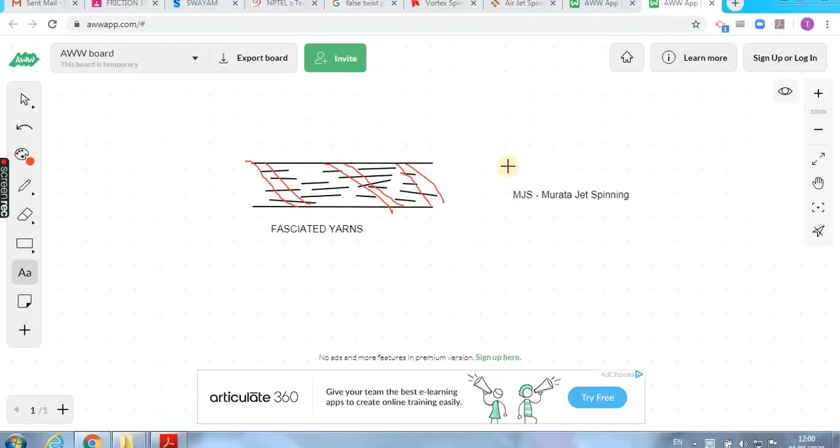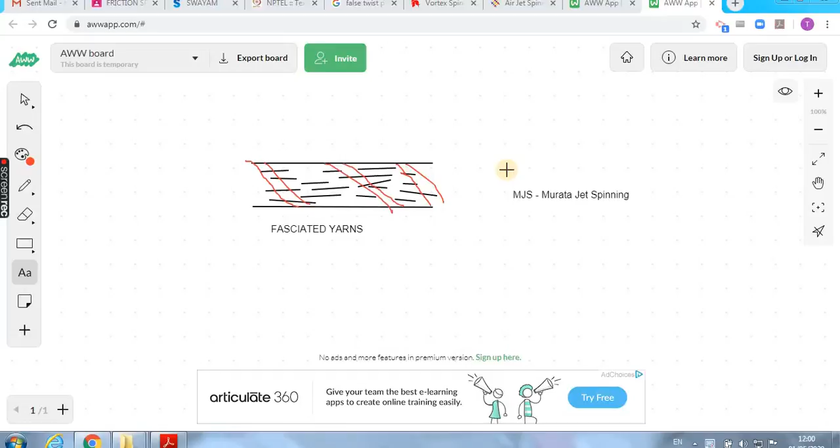So in this video we are going to see the working principle of Murata air jet spinning, or Murata jet spinning, called MJS. We have already seen DuPont. He developed the first machine based upon the false twist principle, but the basic limitation in the DuPont machine is that the proportion of edge fibers is very low, only 2 to 3%, which is insufficient to cover the remaining 95-96% of core fibers.

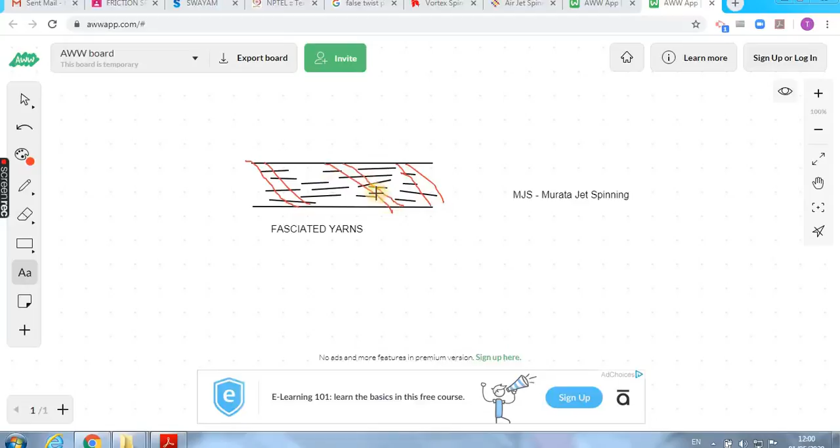So the yarns spun from air jet spinning or the false twist principle are called fasciated yarns. Fasciated yarns are bipartite. They have core parallel fibers over which the edge fibers are wrapped. So these are called fasciated. The main limitation in DuPont is that only 2 to 3% are edge fibers, which are not sufficient to cover the predominant core fibers. So it could not be commercialized in the market.

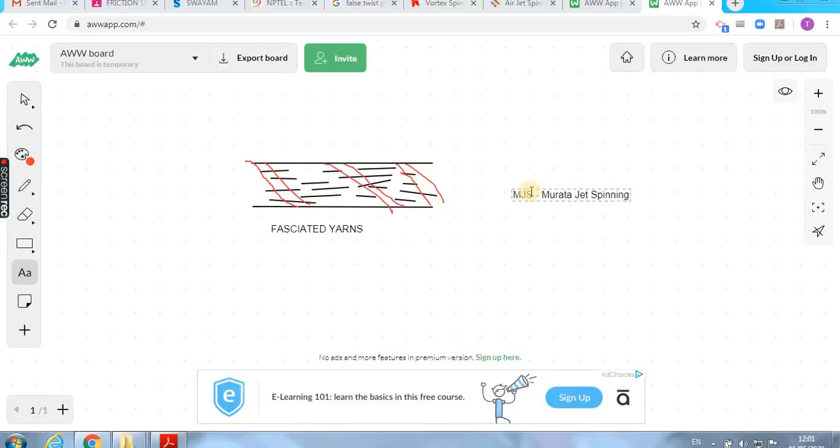So Murata came up with a concept called Murata jet spinning. The basic difference, there is only one difference. Instead of a single jet, we have 2 jets in Murata jet spinning. In DuPont we have only 1 air jet, but here you can find 2 air jets. Here we are feeding slivers as the feed material. You have a normal 4/4 or 5/5 drafting system.

After drafting, the fiber strands come into the nozzle box. This nozzle box has 2 nozzles, N1 and N2. That is the basic difference. In DuPont you have only 1 nozzle; here you have 2 nozzles, N1 and N2. In Murata jet spinning there is a separate motor for each individual drafting system. That is a unique feature. There is no common drive like in ring spinning. You need a separate motor and separate air pressure for air jet spinning.

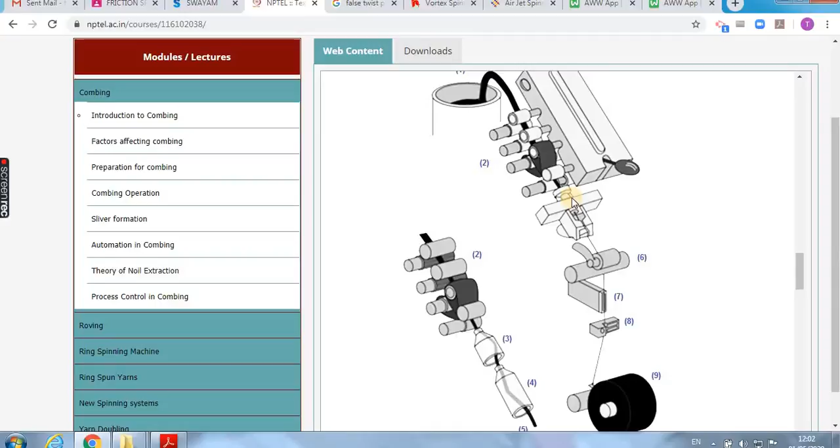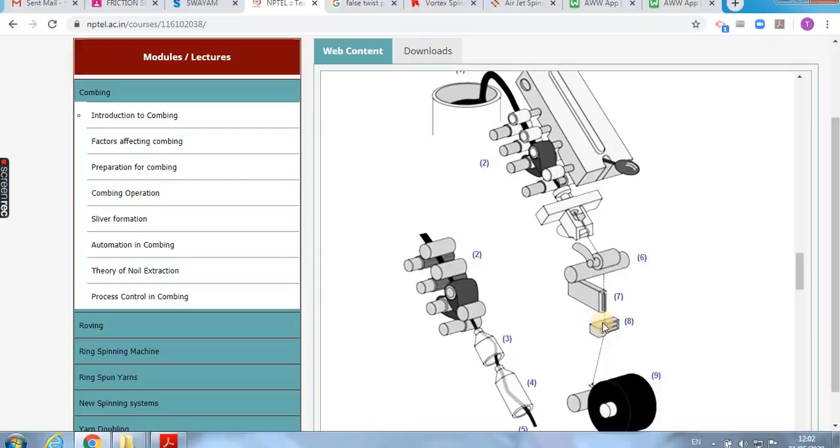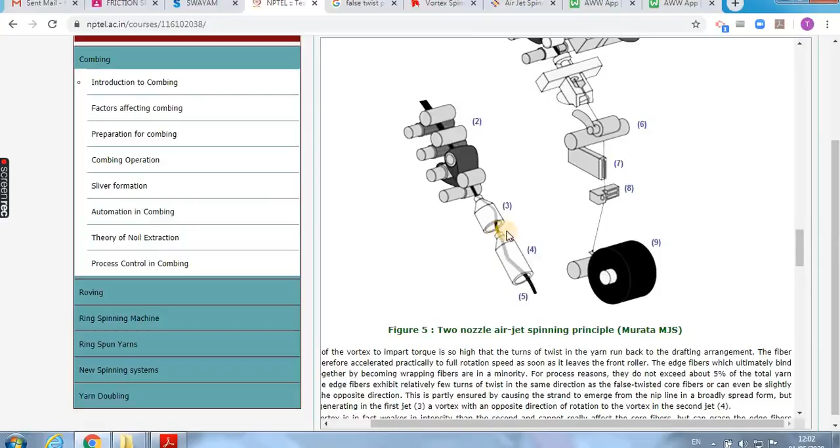So you have a separate motor for each drafting system, and a compressor for creating air pressure inside the nozzle. After the air jet nozzle, it comes to the withdrawal roller. Then you have electronic yarn clearers like an autoconer, and waxing can be done. Then you can wind it as a bigger package. That is the material passage in Murata jet spinning. Compared to DuPont, the major difference is the 2 nozzles, N1 and N2, shown clearly here.

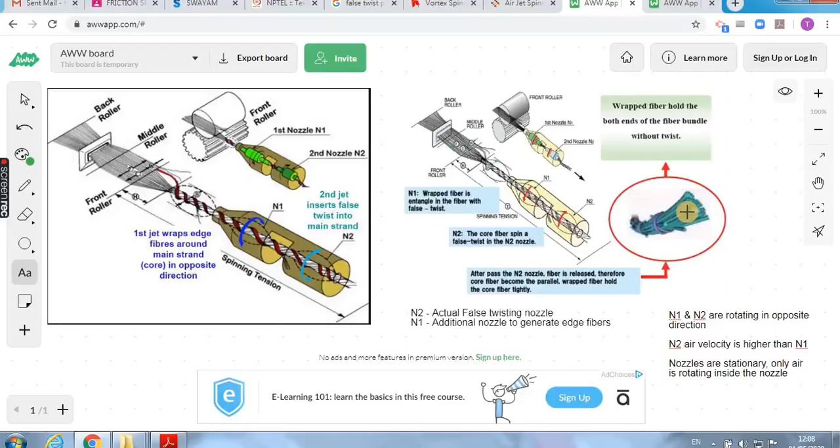So here this blue color is the core fiber; 90% will be core fibers. These small purple colored fibers are edge fibers which are created by means of N1. They will be wrapped over these green colored fibers which are core. So here you can increase the number of edge fibers from 3% to 8%. There is an improvement of 5% compared to DuPont. Right? So that is the mechanism in the case of MJS.

You are using two nozzles. So this diagram will explain how the twist is changing from the front roller to the delivery. Right? So here you can see the central portion is the core of the yarn. This is the core. Then comes the sheath on the right hand side and left hand side. So the twist direction on the right hand side is Z and on the left hand side is S.

So this is the front roller. You can see this is the front roller nip. The first one is the N1 nozzle and the second arrow mark represents the N2 nozzle. So this is clockwise, this is anti-clockwise. Both are rotating in opposite directions, and the velocity of N1 is less than the velocity of N2. So here you can see the direction of twist in between N2 and N1 is S twist. Right? So here you have S twist.

But after the N1, you can see the amount of S twist has been increased because of the twisting given by the N2. But you can see more edge fibers are created. There are no edge fibers here because N2 is rotating at high speed and will wrap all the fibers. But here N1 is preventing some fibers from twisting. So you are creating more edge fibers. So between the front roller and N1, the S twist will be high and the Z twist will be very less because you are having some wrapper fibers.